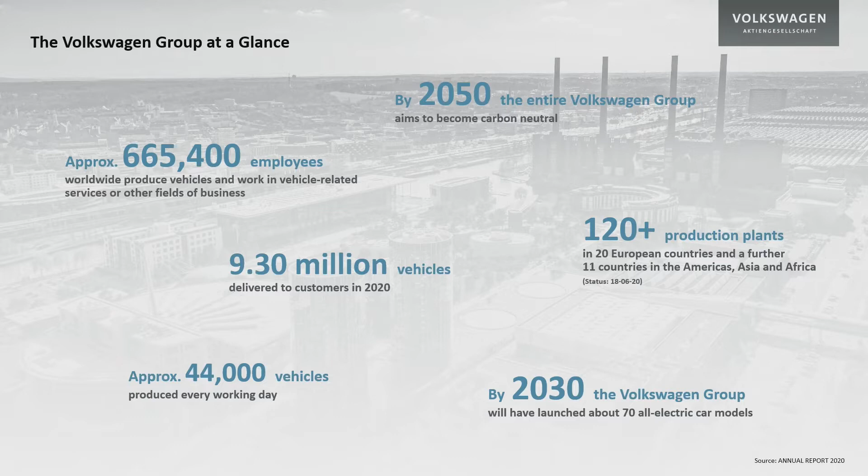However, if you talk about introducing new material, introducing lightweight solutions, we have really to keep one number in mind. This is more than 40,000 vehicles that we produce worldwide a day. So this is always the dimension that you have to keep in mind if you simply say, oh, just change the structure, not the problem. Just take magnesium, not a problem. It is sometimes a problem.

And then why we are thinking that Volkswagen has to go to zero, why Volkswagen Group has really the goal to make its contribution, a big contribution to the carbon reduction in the world. So from the greenhouse emissions, 14% are caused by the transportation sector, and simply according to the size of the fleet of the Volkswagen products, Volkswagen alone is contributing 1% of the worldwide greenhouse emissions. So we think as a company that we have to deal with that and we have to do something.

Now let's come to the technical questions. First about the future mobility changes. So what are the customer expectations and what does it mean for us, for you as engineers, for the needs we are confronted with and with the work we have to do?

Sure, customers expect for the more distant future that they have autonomous opportunities by using their cars. That if they use this more or less autonomous opportunities, they want to be more private, they want to be more convenient, they have other expectations to the interior of the car and to the use of the car. They want to use the gained time to be productive or efficient or to play computer games.

They expect much more that their mobility and the mobility they choose is sustainable. Still, most of the customers expect that they will still have an option to drive their car manually. Especially in the last 2 years, according with the pandemic, people expect much more about hygienic issues and about well-being in the cars. Sure, they want to be seamlessly connected with their cars, and sure, they want to take into account that their car takes into account everything that's going on in the actual traffic situation.

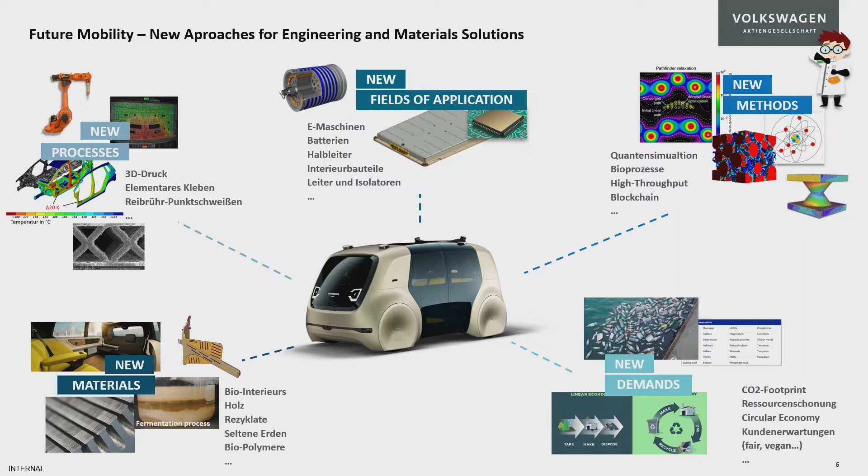We have sure new materials to think about, because today we take into account the carbon footprint of our components and of the materials, something that was just 6 to 8 years ago not really discussed. So suddenly we have to think about biointeriors, wood, recyclates, rare earth materials, and also their availability.

This is also part of the new demands: it's about carbon footprint. We really have to report for every single component in our car, not only the weight, but also the carbon footprint for the materials used, for the production of the component, and for the assembly process in our factory.

This completely shifts the point of view for a number of materials and lightweight applications. Customer expectations are changing too - they are asking for vegan materials. And with e-mobility, we have a growing use of metals we never thought about before, like cobalt and lithium, and suddenly the question is asked: how long will this be available?

Finally, if we develop new materials, we have to talk about new methods. We have tools that were not available just 6, 7, 8 years ago, like quantum simulation, bioprocesses, high throughput simulations, and so on.

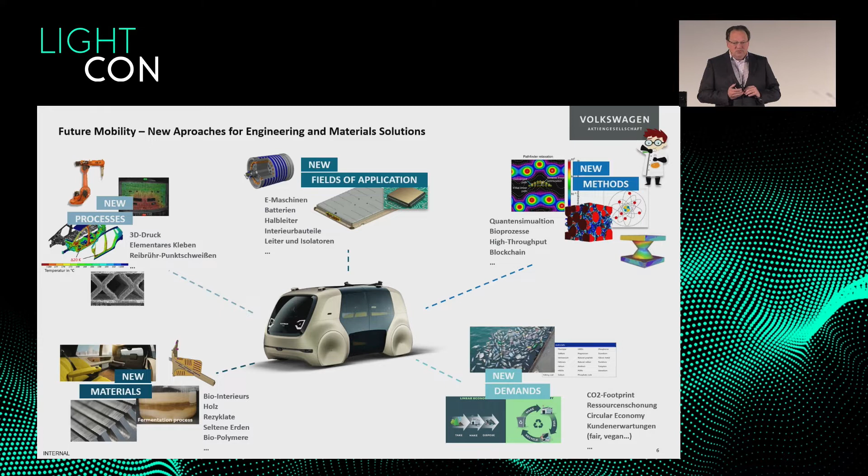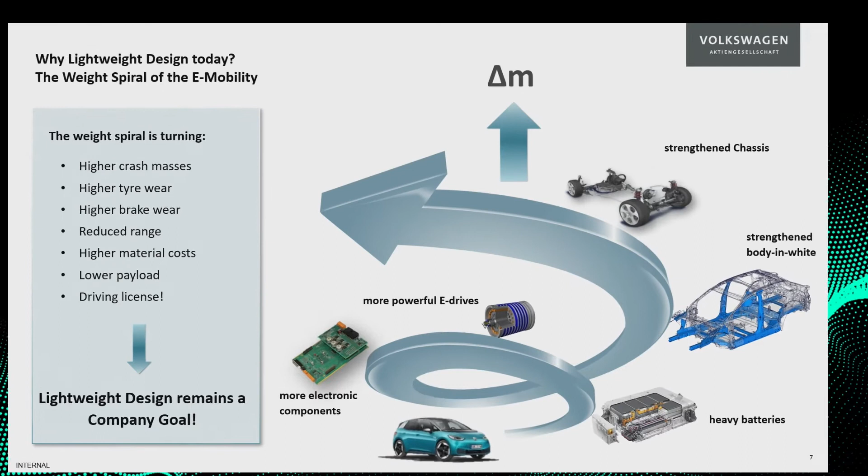Just a few years ago I always showed this spiral the other way around, but in the last years with e-mobility this has really changed. If we come from an e-mobile today, we are suddenly faced with a very heavy battery. According to changed customer expectations, we also face more electronic components, and we need more powerful e-drives to move all this.

In the next aspect, we need a reinforced body in white, also according to new regulations on crash and safety. And this heavier weight will need a reinforced chassis, and so on.

Today people often say, okay, but I have recuperation, so I don't really have to care about the weight. But my impression is that if you lose discipline on lightweight engineering for just 1-2 years, suddenly the weight is exploding. If you compare all the cars on the market to comparable classical combustion engine vehicles, you see a gap of 200, 300, 400, 500 kilograms.

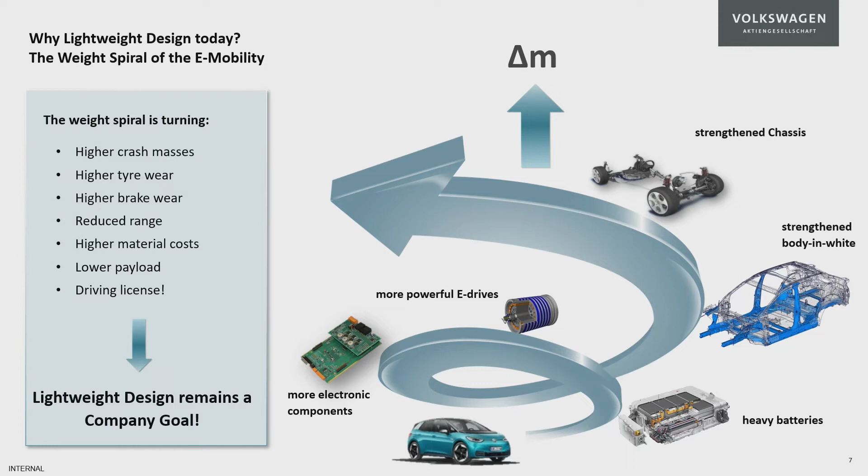This causes other aspects too. Crash masses are higher, again contributing to the weight spiral. You have significant tire wear in some vehicles, brake wear, and the range is not really that much affected, but it has an influence - we are really fighting for every mile.

What people often forget is that if you have a car that's 300 kilograms heavier, it's 300 kilograms more car that you have to pay for. It has to be produced and purchased. Payloads are going down, and in the luxury and heavy-duty segments, we're coming into a situation where we really have to discuss the validity of the driving license.

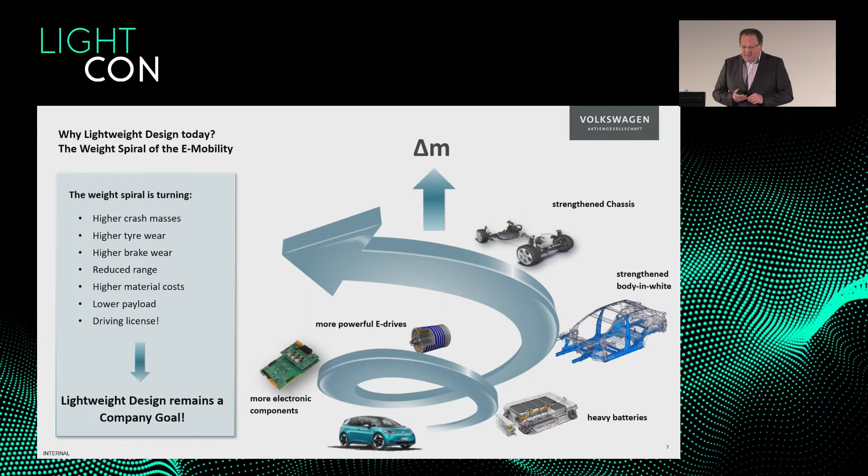So we have to really face the fact that lightweight design remains a company goal. Now I have created this triangle to visualize the situation - there are other theories, but generally you can achieve lightweight in a few ways.

And then something I've called conceptual solutions - I'm still working for the right expression. The idea is: if I spend money on lightweight design, one of the smartest ideas in e-mobility for lightweight design is to spend the money not on a new alloy, but on a more efficient battery.

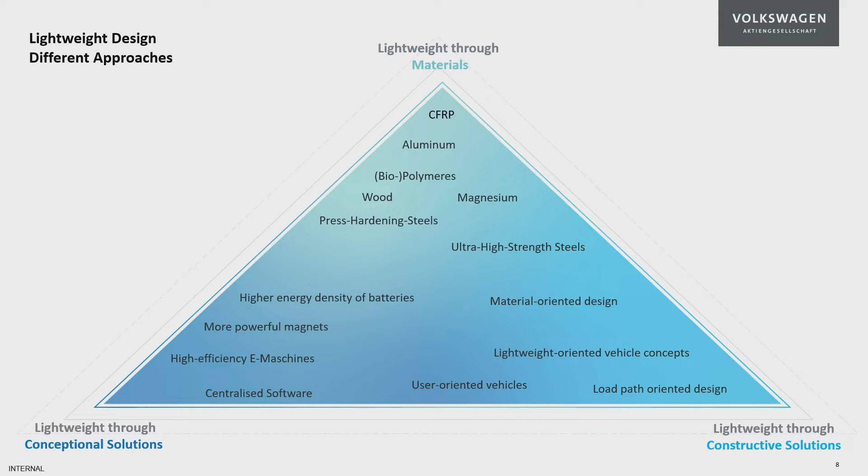If you have more efficient batteries, you need fewer batteries. That's the easiest way to reduce your costs and the weight. Same for more powerful magnets in your high efficiency e-machines and so forth and so on.

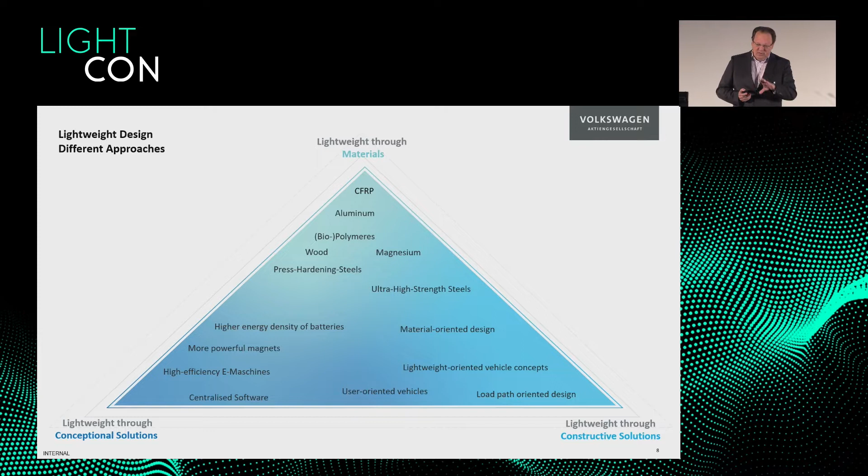I mentioned before that we have to take into account today the carbon footprint, so we cannot only look at this and think what would be the best solution. We really have to add a third dimension, and this means the carbon footprint, or the carbon advantage we achieve by using a certain material.

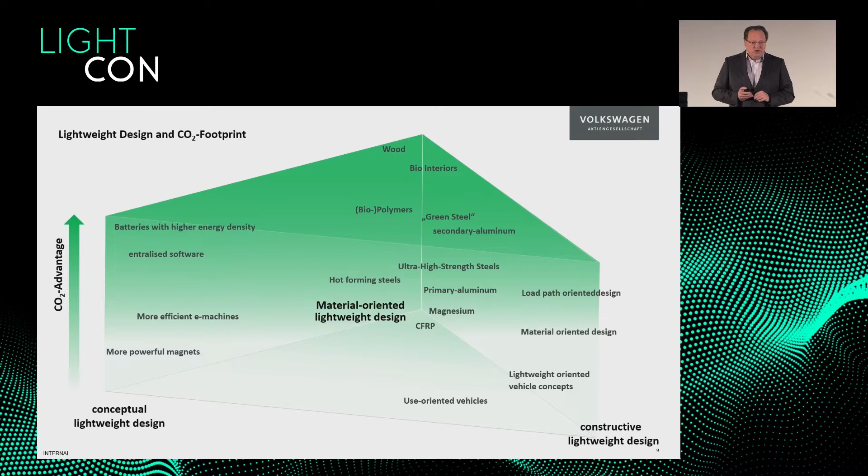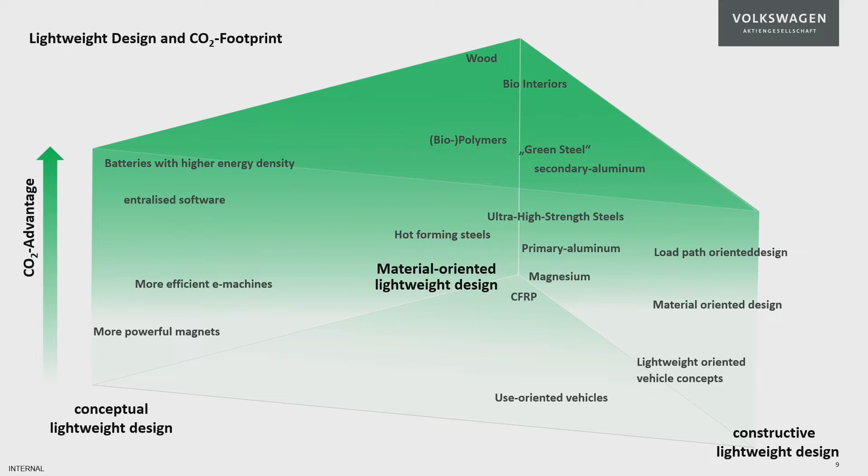And if we lay down the triangle that I've shown, and we go on the next axis, then we see that it's just a very rough estimation. But then we see that, for example, the choice of magnesium and carbon fiber reinforced plastics has a big lightweight impact, but unfortunately not really a good impact on the carbon footprint. While wood is not really a lightweight material, it is light, but not the lightest solution, but it would even be higher because it gives you a carbon benefit, not only a carbon footprint to the car.

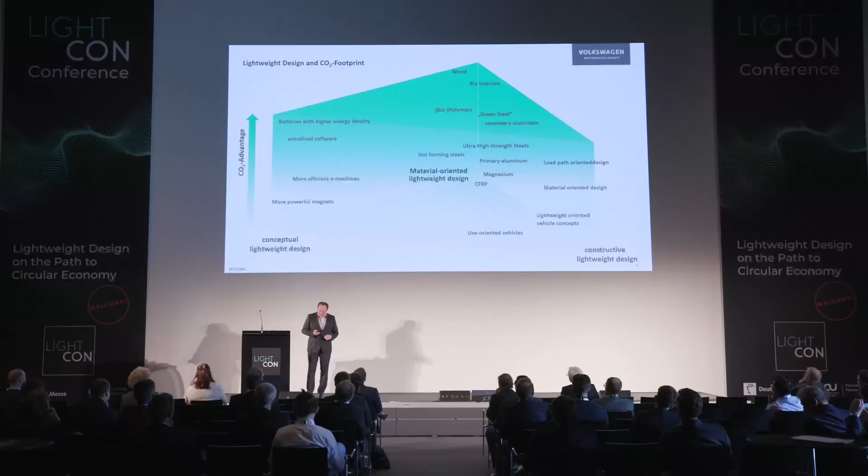Same for the batteries. If you need fewer batteries, you have a better carbon footprint, very, very simple. But if you need to work with more powerful magnets, you may have to introduce more rare earth metals, more complicated energy-intensive processes, so probably your carbon footprint will not be as good. But again, this is just a very general presentation.

Now, we talked about carbon footprint and we talked about lightweight, but you also have to talk about circular economy. In the past, our approach was normally that we use something in a linear economy—we use something and at the end we put it to waste.

Today we are mainly confronted with a recycling economy, so we use something, then we reuse it, maybe we downcycle it, so we use it first in the car and then, I don't know, somewhere in a toy or in a plastic waste paper basket or whatever.

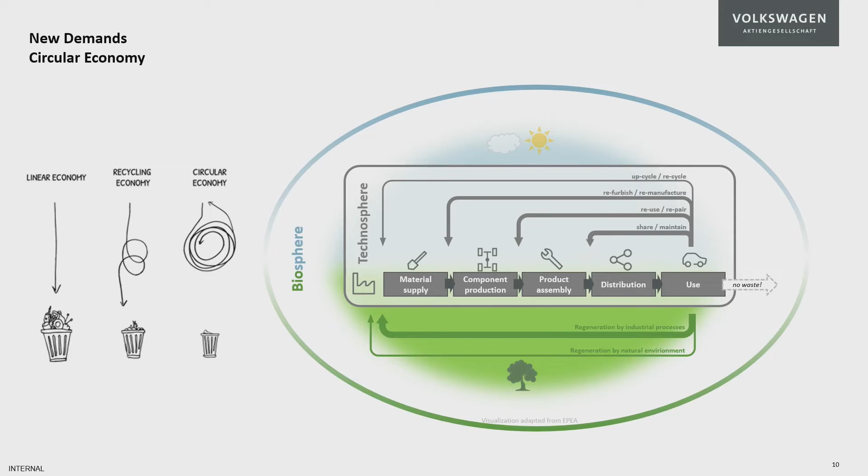And the idea must be a circular economy where we really use always the same materials. And for this, we have created for ourselves, around the inside the biosphere, the technosphere.

So what happens when we make a car? We need a factory, we get material supply, we make components from it, we assemble the product, then we send the product to the customer who uses it, and then, in the best case, after the use time, for each step in the production, we find a solution.

So probably if we refurbish the complete car, bring it back to the market, probably we dismantle it and use single components, or for those parts we can't use anymore, that we can't refurbish, we still have the option to win back the material and recycle it.

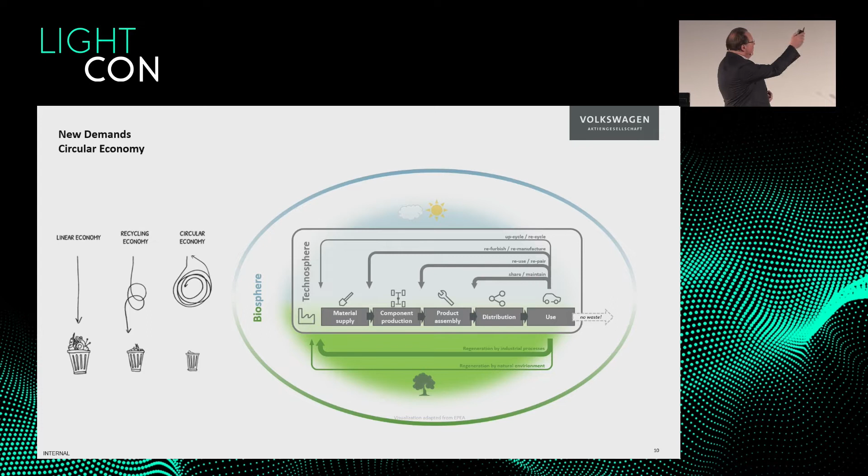This is the idea. The same—the lower strokes there are about the energy and resource use of the factory itself. So this is now the next step we have to keep in mind.

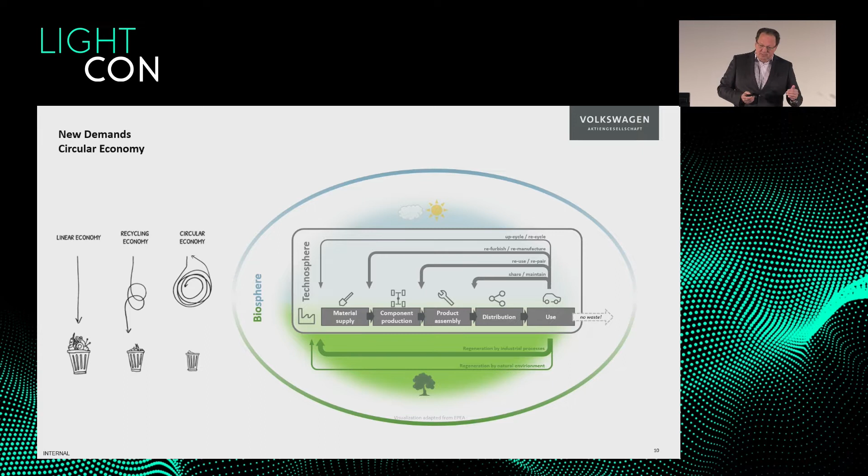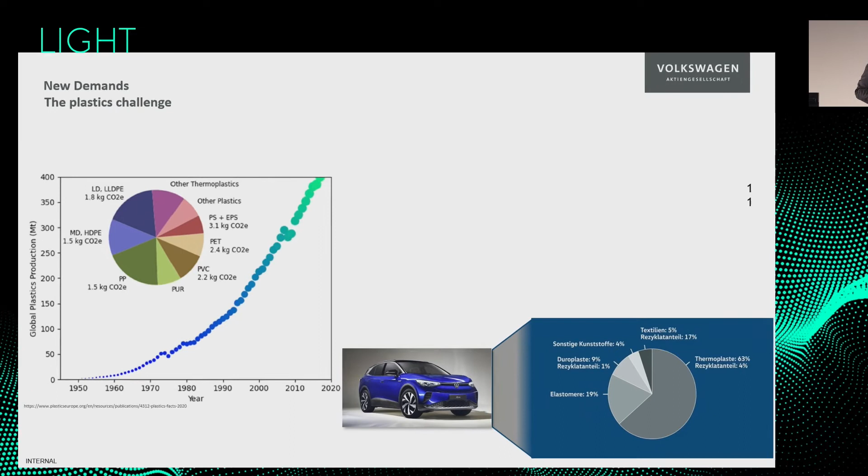Now I come to a number of examples of how we deal with this, with these interactions, to give you a feeling about how we are dealing with it concretely and how we are really working on these questions. Because at the end of the day, you can make general strategies, you can make big pictures and big PowerPoint presentations, but at the end of the day, you really have to deal with very concrete questions, and this is where I will now focus, giving you some examples.

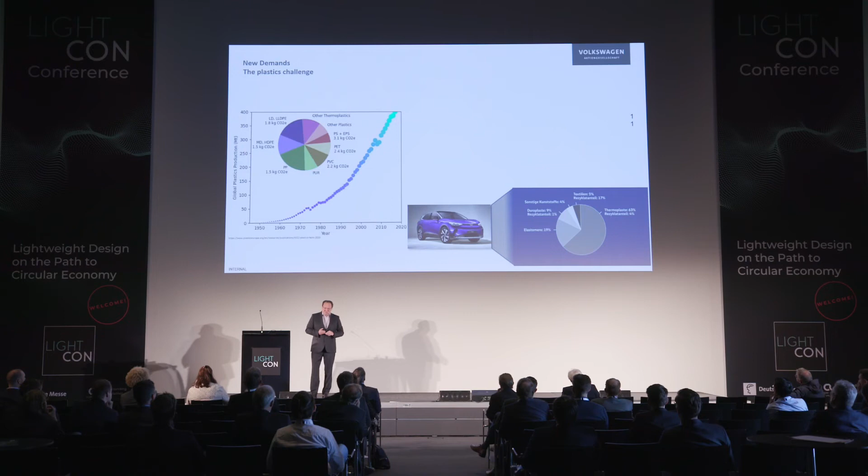For example, the ID4—we see a number of the ID4 is using mainly plastics. It's about 350 to, depending on the version, 380 kilograms of plastics used in the car. Most of it is thermoplastics, but also elastomers and duroplastic materials. And the recycling content, as you see there, is still on a disappointing level. So we really have to deal with it.

And I like this presentation very much, although it's 3 years old. But it simply shows the use, or the production, the worldwide production of plastics, over time. And we see that this curve is not stopping. So the material that is available for recycling, that is coming to the market, is becoming more and more. And if we talk about the recycling market today, you have to think about a product that's maybe 10 years old.

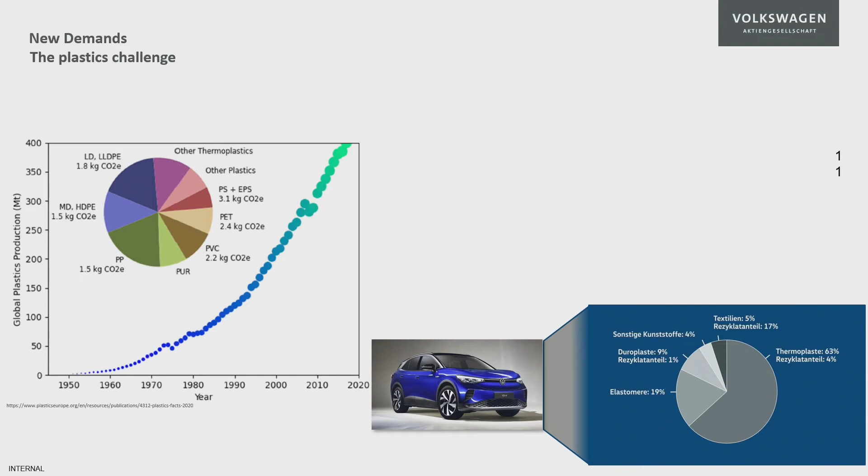If you look at the curve, we talk about the amount from 2010. But if you think about the cars we make today, or the concepts we make today, we have to talk about the amount coming on the market from 2020, which is nearly twice as much. If you take the numbers from 2018, the ratio is more or less the same.

Most of these plastics are manufactured from fossil bases, but we really have to go down to zero to achieve the goals on carbon footprint. This forces an enormous amount of capacity, not only in the automotive industry, but also the consumer industry and the chemical industries, to recycle as much as possible, but also to find solutions to improve plastics by bio additives, by bio-based material that you add to the material.

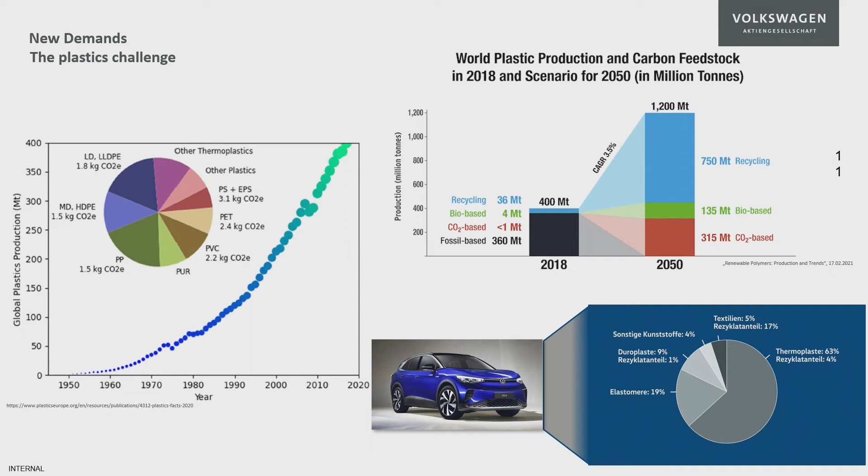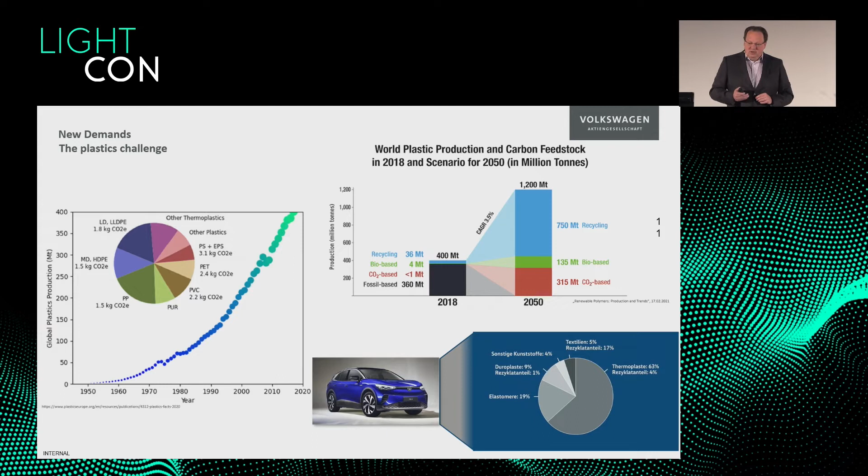We are also working on the question of how you can reuse carbon dioxide. I know it's from an energetic point of view maybe the holy grail of the most complicated question, but if you come to the time where we have green energy really available, as promised by politicians, then you can use that green energy to reuse carbon dioxide and make plastics from it again.

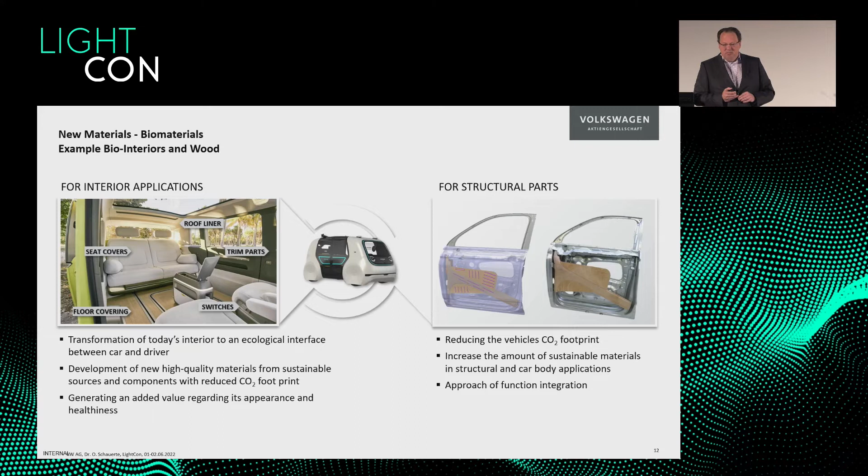Now, materials - another completely different field is biomaterials. Why having a carbon footprint at all? Why do we need that? Why don't we think about solutions where we don't have a carbon footprint?

For example, interior parts like seat covers, roof liners, door liners and so on, we could make from hemp, from grown structures, from agricultural byproducts. We could really create materials, I will show later, from a bioreactor, which are completely, in their production, more or less carbon-free.

The other option is to make parts from wood. There's really no use of wood in the automotive industry currently, but why don't we think about using it? What you see in the news is maybe a little confusing, but we have so much knowledge about fiber industry, about fiber manufacturing, and we have so much wood.

Especially beech veneer - beech material has the highest ratio of strength to density, and we have so much beech, only in Germany, and then we haven't even talked about Austria, Poland and Czech Republic. We have so much that we make charcoal from it for barbecue because we don't know what else to make with it. This is the simple truth.

What you see here is a component we have developed as an example: a door impact beam, a steel door impact beam, replaced by a wood solution in a weight-neutral way. Additionally, the bitumen mats normally glued to the door inner are introduced into this wooden structure. This is just an example for wood.

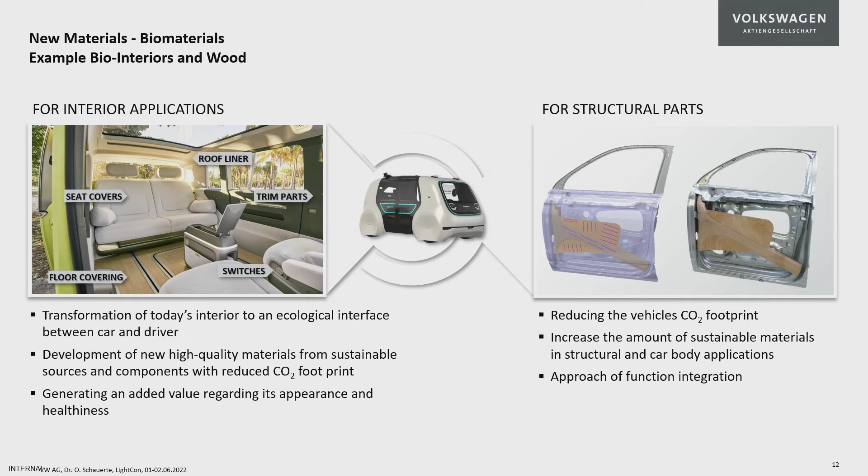Now biomaterials - we have classified them. On one side, we classify bio-based products as agricultural byproducts. The best example, material not from us but on the market, is pineapple textiles. They use the leaves of the pineapples to create fibers and make something from it. It's a good product because there's nothing else you can make with it.

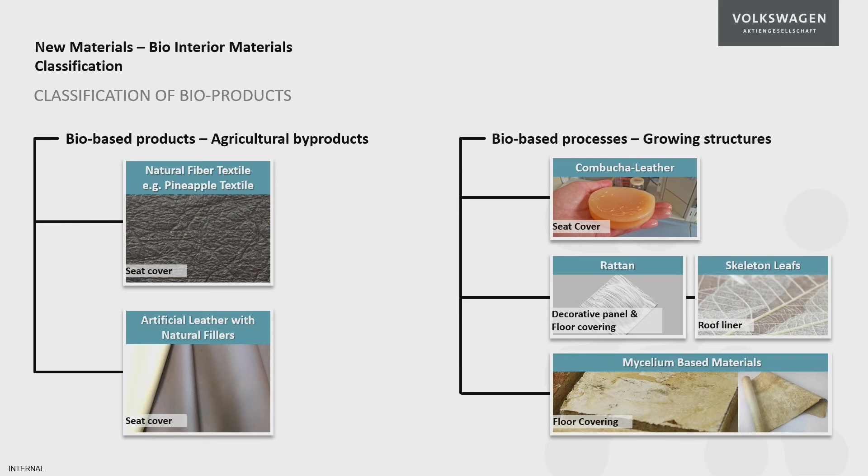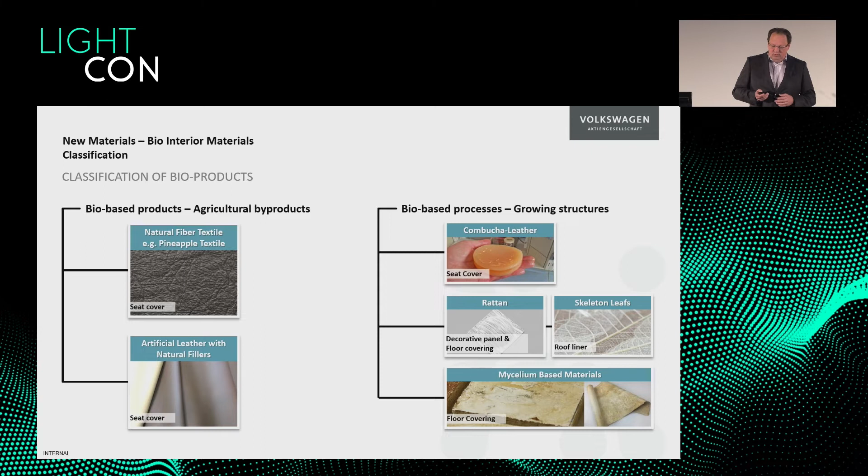Then we talk about artificial leathers - I will have an example afterwards. And sure, we have the bio-based process, growing structures where you can maybe create really leather-like materials just from yeast or from mycelium, Pilzen, or even wooden byproducts from the wood industry that could be compressed into components. What we will never do is use any agricultural ground dedicated to food production. We will never use this ground to create anything for our cars. So no agricultural ground and no food for cars - it must always be byproducts or created in bioreactors.

But people often forget it doesn't really have a very good carbon footprint. Before somebody shoots me - there are thousands of calculations about the carbon footprint of leather, because it's very difficult to assess which share is for the meat and which is for the skin. Nevertheless, it is significantly high, and unfortunately even higher if the cows are living free on the ground and not housed somewhere, because then all the gases go outside.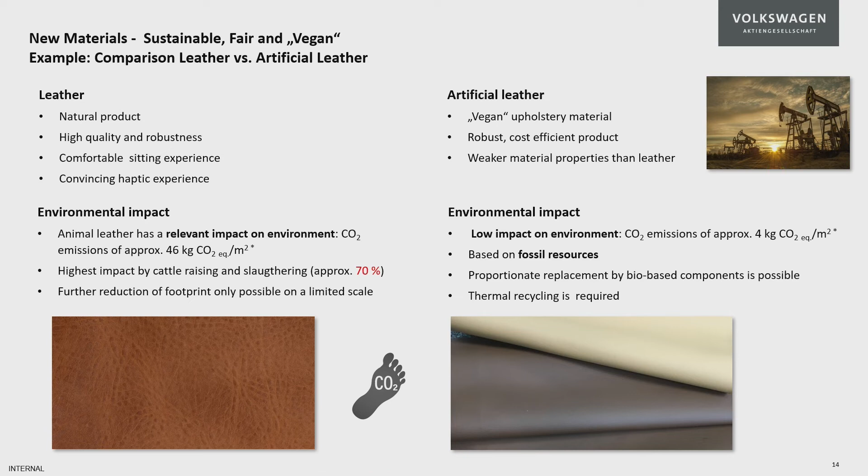Artificial leather is quite good in its impact, but could be improved. Customers are hesitating, saying, okay, I want to have a vegan solution, but plastic, I don't know. Now we have found a solution to improve these leathers by filling them with byproducts.

We have an example you find even in the press. We call it coffee leather, a project with Heimbs Coffee in Braunschweig, where they provide the silver skins of the coffee beans. There's nothing you can do with it, you can just burn it. So we mill it and feed it into the polymers we use for the artificial leather, the leatherette. In the end, together with the hemp bag, we can create a leather with a bio content of more than 50%, and that's a nice first step.

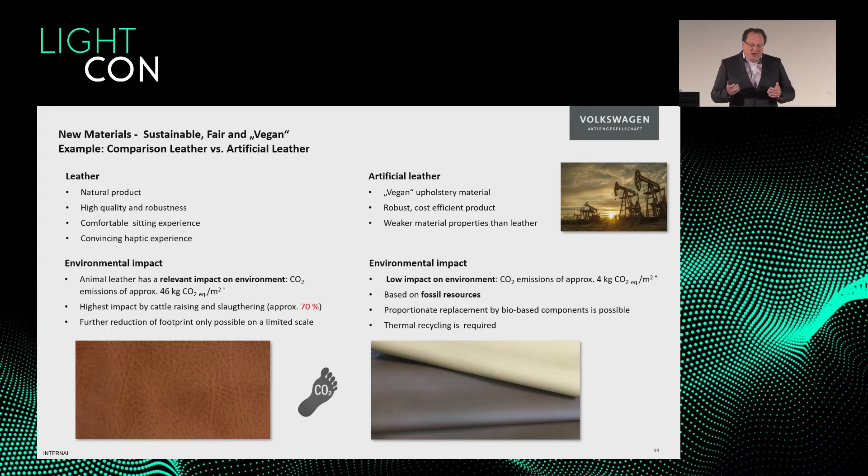More projects to come. My favorite is the beer leather, we are working on that. You have similar byproducts there too.

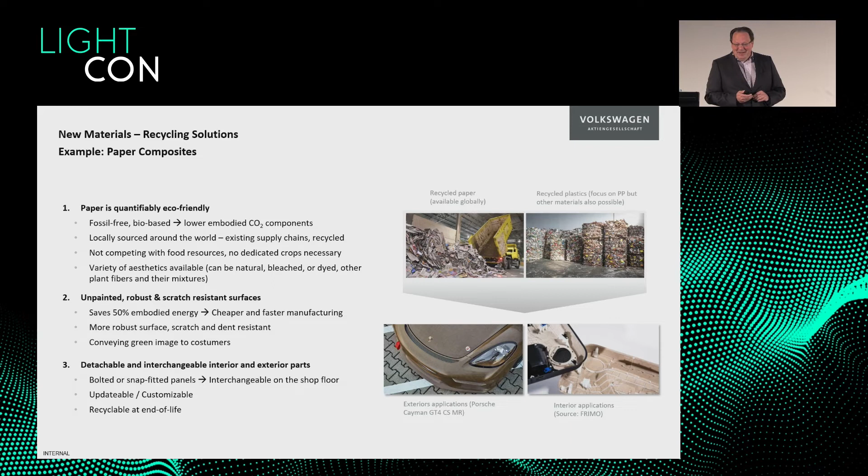Another idea we have already dealt with is the paper composite. You can compress paper very intensively, or create a leather kind of liquid so the fibers really fall apart, and then afterwards infuse it with thermoplastics, or with duroplastics, those thermosets, and then compress it.

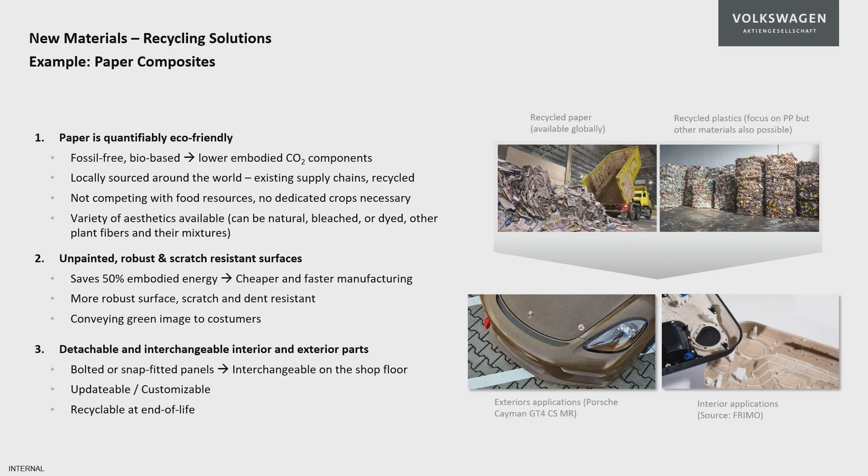You can compress it either to exterior parts, as Porsche has tried and demonstrated, or draw on a paper composite from a carbon footprint perspective. It's interesting, not really lightweight, but not really heavy either. And you have it everywhere in the world, people collect old paper everywhere. So you have very short distances for production and collecting, giving a good carbon footprint. A very interesting project.

Another thing, I have to hurry a little, is steels. I think it's important, especially at the Hannover Fair, to talk about steel. Steel is still the most important material. 96% of the worldwide used automotive body-in-white material is simply steel.

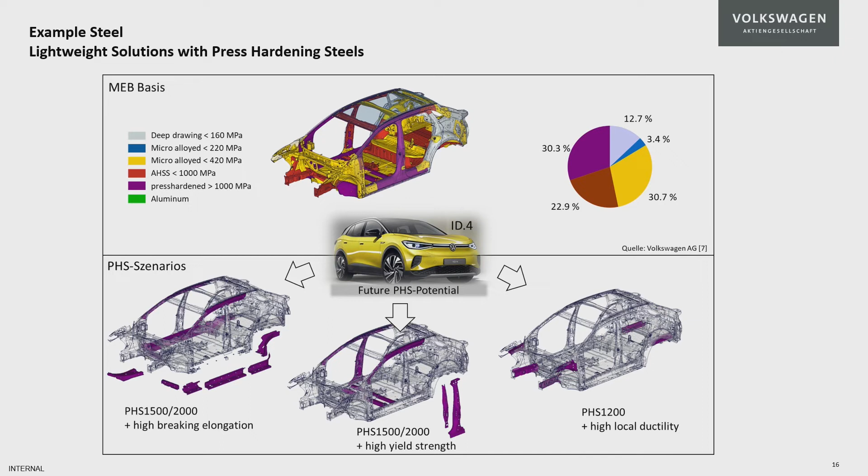We have a large variety of steels used in actual cars. With press hardening steels, we think we can reduce the number of steels we use and change the properties in the press hardening process through different heat treatments, forming processes, and forming temperatures, so we can use the same steel for different applications depending on whether you need a tensile strength of 2000 MPa or maybe just 1200 MPa. It's always the same chemistry, so it can always come from the same metallurgical process.

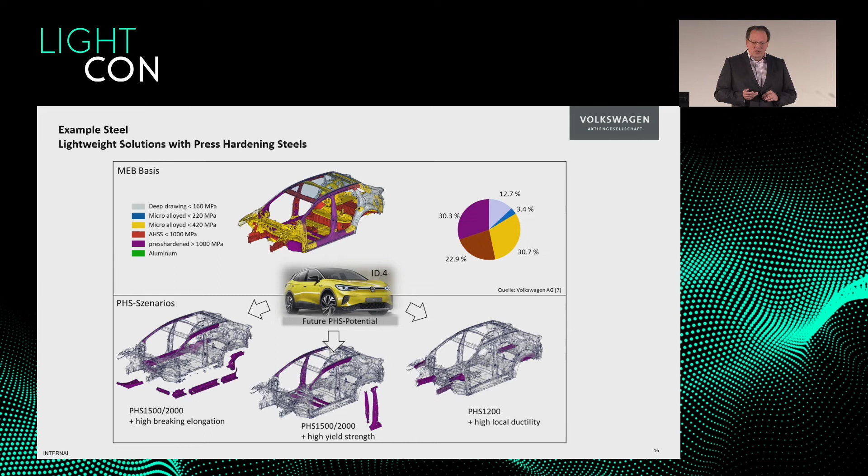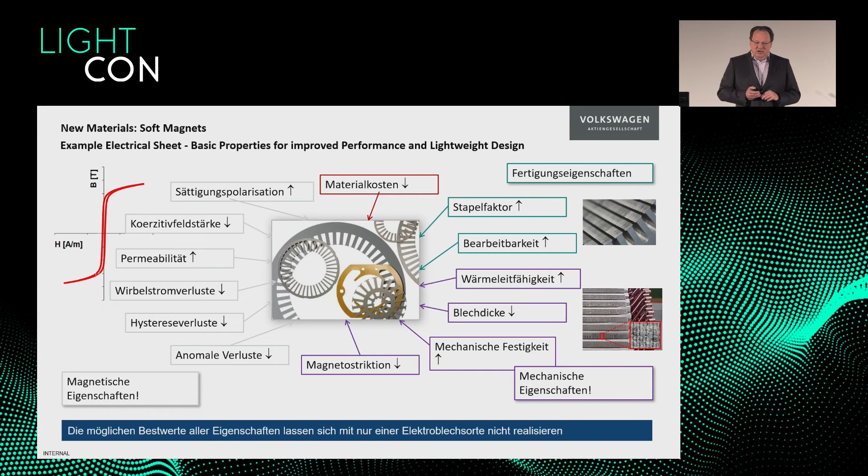Then let's talk about magnets, for example. Just to keep in mind: if we can improve the permeability and reduce the losses, and reduce coercivity and improve polarization, we have better soft magnetic materials. On the other hand, we have the mechanical properties.

What we would like to achieve is soft magnetic alloys, normally iron, silicon, steels, electrosheets, so we can go to higher revolutions or a more compact, compressed electrical engine. In the best case, combined with better hard magnetic materials.

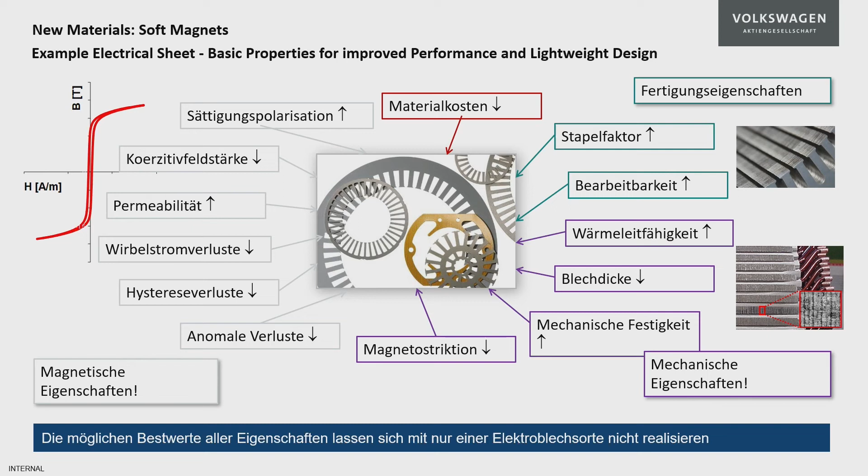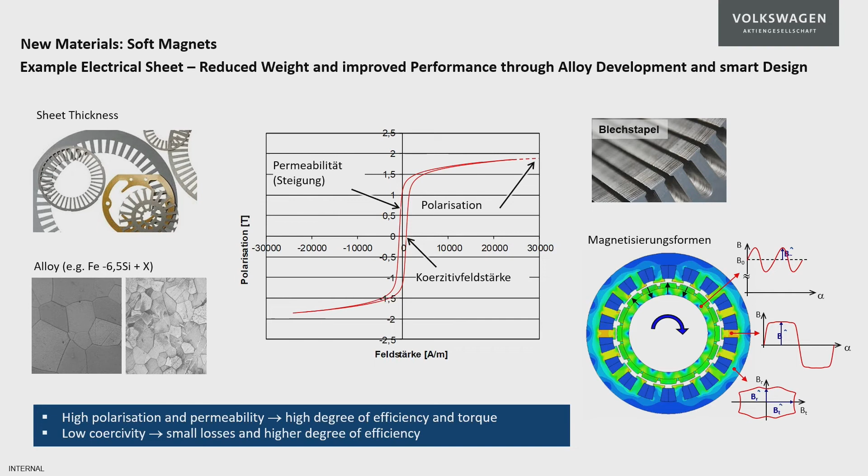Just as an example, as a reminder, it's not only about alloy development, as you see here with iron, silicon, and so on. It's also about the design, and about using the optimized magnetic fields. But I don't want to spend too much time here, let me use the last 2 minutes.

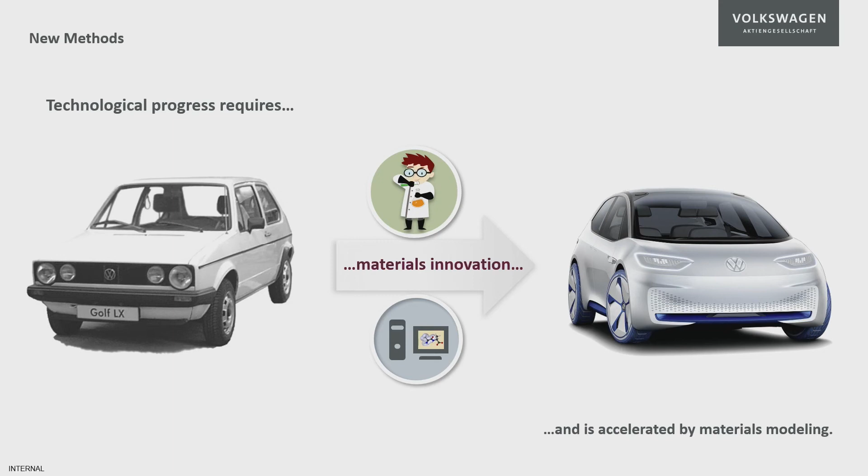I'm going to talk a little bit about new methods. Finally, we can improve all these things, whether it's lightweight design, physical material, or battery material, we can really achieve improvements today by using new methods. And these are the methods.

What I'm talking about is really quantum simulation, it's high throughput today. So very often you read, when you talk about new quantum computers, the question is, where the hell do I need that much computer power? There are always two examples: traffic simulation and material development, so that you can combine different metals.

In the past, it was very much trial and error: oh, I take 2% more silicon and maybe a little less titanium and a little more molybdenum, then it should work. Today, we really run through all the elements on the computer, and we can precisely predict the material by simulating the interactions of the electron with the nuclei and with the neighbor atoms or neighbor nuclei.

And this really allows you with quantum simulation to predict very precisely all physical components. Not the mechanical properties, but the physical properties, and this helps very much.

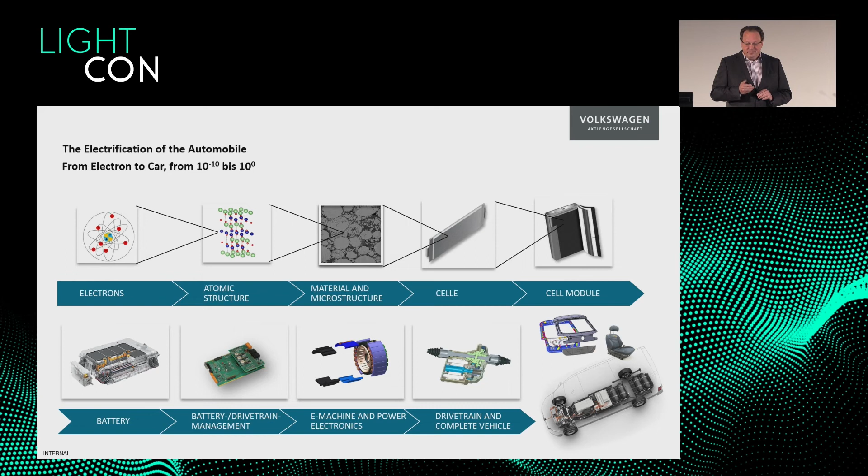And so today we run, not in a closed loop, but finally we run through all the projects, through all the components, from electrons about atomic structure, and so on. And we have tried to put this into a kind of categorization.

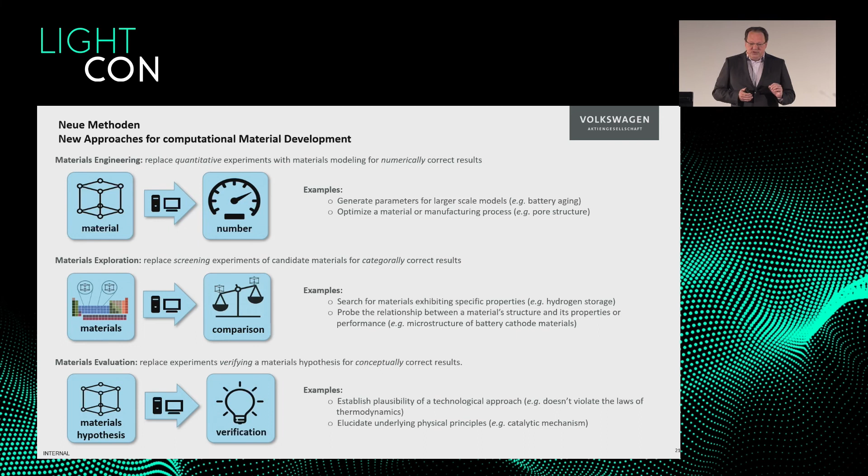This means we make materials engineering, materials exploration, and materials evaluation. Engineering means that we have numerical ideas for the modeling, for the simulation of the materials. Then we can replace this materials exploration.

We really run through the periodic table of elements. We replace the experimental screening by computer technologies, and then the materials evaluation. This means that we really make a materials hypothesis, and we replace the experiments by verifying materials hypotheses in conceptually correct results. So it's numerically, categorically, and conceptually.

And in this combination, this is something we are really doing in our team very successfully, also with universities in the United States and in Germany.

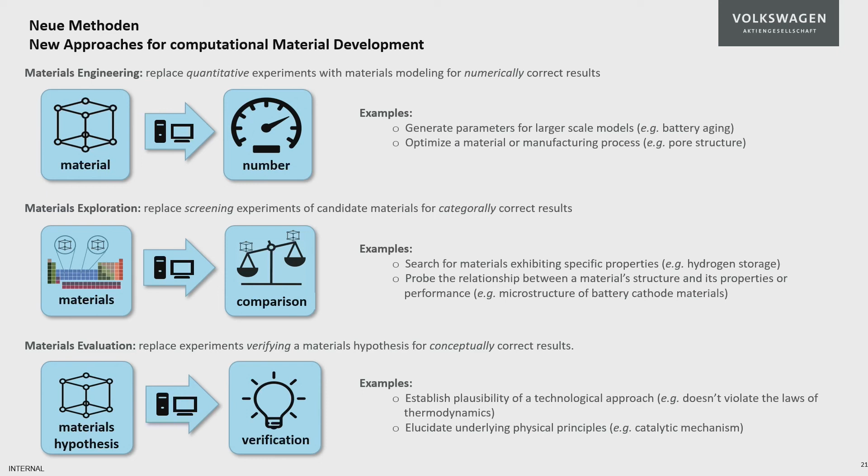And this maybe finally should give you a little bit of an outlook into the future, how materials design will happen, and how this could, looking back into this presentation a little bit, really contribute to lightweight design and to carbon neutral, hopefully one day, carbon neutral mobility.

So finally, the conclusion: we have to face the fact regarding the discussion on lightweight, LightCon. The weight spiral has turned around, and the higher vehicle masses cause more crash mass, cause more cost, cause more wear. We have new demands for footprint, for carbon footprint, for the components and for the production processes as well.

The carbon footprint will push solutions away from the classical lightweight solutions. However, modern materials development will be part of the solution even more often.

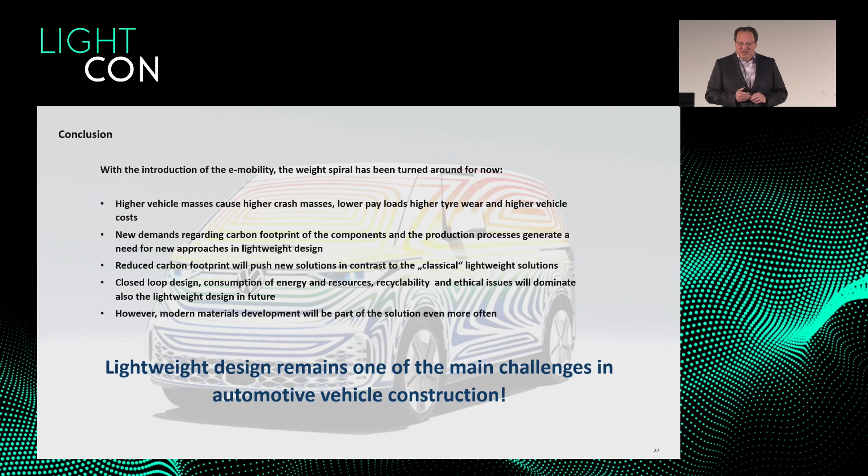So I can invite everybody to really go to the university and learn a little bit more about material sciences, because lightweight design remains one of the main challenges. So thank you very much for the presentation, for listening.